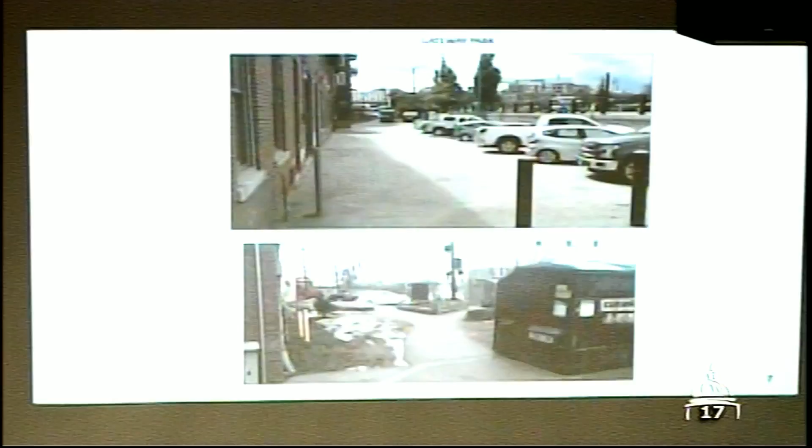That becomes the Gateway Park. This is from the stairs as you walk down to Storrs Street, looking all the way back to Main Street. And this is just a close-up of what you see as you get there—a couple of dumpsters and a sort of forlorn park.

And then this is the Dixon Plaza area, 7 parking spaces sort of stuck between the building and Storrs Street. We actually own about that much of it already, and we'll get about that much more.

So there are 6 ADR items: 3 building elevations - the 1 Eagle elevation changes, the 6 Dixon elevation changes, the 14 Dixon elevation changes - and then 3 landscaped areas: the Eagle Plaza, the Gateway Park area, and the Dixon Plaza. So this is what we're proposing.

For 1 Eagle, essentially we are replacing the storefronts and installing an elevated walkway that provides accessibility to the building itself and to the 4 storefronts. We do that using materials per the vernacular, as ADR says - all the granite and whatnot, using the Main Street design.

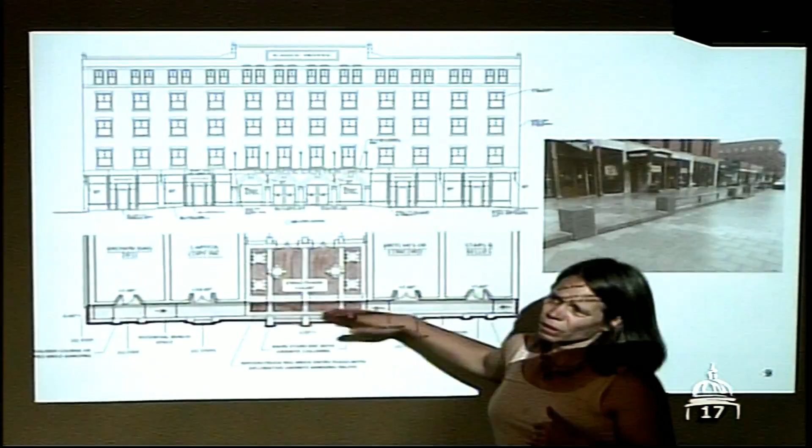That's actually on the next slide, but we propose a canopy there. It's not appearing on this plan because this was really just a landscape architect's plan. But yes, this canopy, which looks sort of like the one on the Bagel Works Plaza, will project over the new walkway section.

If you can back up 1 second, Steve. So if you look, that's One Eagle in front. There's the brick section with all the trees and whatnot, then there's sort of 2 sidewalk sections.

What we are showing extends to this middle line, and only that middle line. We leave this section, what we call the bypass sidewalk, so that pedestrians who don't wish to visit One Eagle are not forced up onto our elevated walkway. They can simply bypass. Part of our development agreement requires the city to maintain that width, which places some design limitations on us.

Thank you. So that's what it looks like. It leads to One Eagle, which has this colonnade in front.

So this is kind of an interesting plaza area. The right of way is here, but this plaza sort of extends under the actual canopy of the building itself, creating a nice indoor-outdoor-ish space.

Next slide please. That's just a little bit more technical version of what you saw. One of the discussions some people on ADR brought up, though I don't think it was a consensus view, was about all these stairs leading up to the storefronts - why have so many stairs? Why not just have a single entrance point here and then the ends?

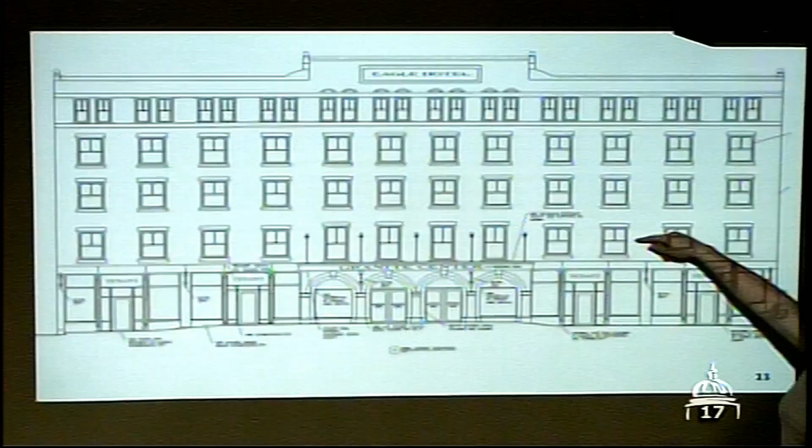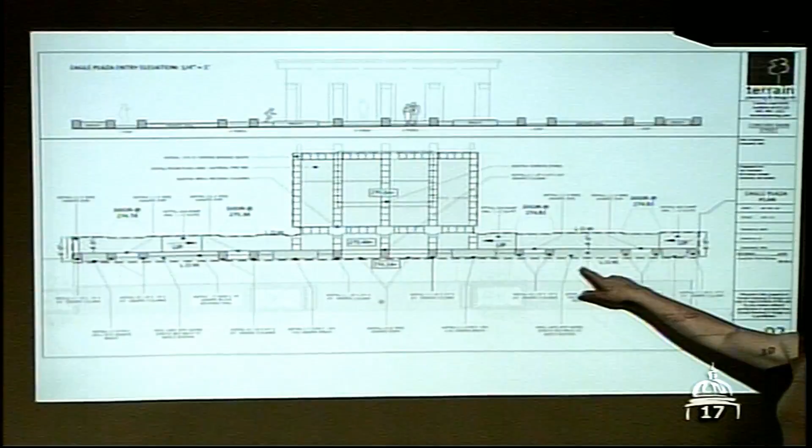Do you mind if I add one more element? Our engineering noticed that these are in front of the entrances, and since it's only five feet wide, there was concern that if someone was using a wheelchair, they might catch this and tumble over. So eliminate these two and put one in the center. I think they might have been open to that idea. The only problem is that doesn't work in this scenario, because between the two storefronts is the ramp, and there's no other place for that ramp to go. So that solution might work here, but then you'd have a non-symmetrical solution.

What I'd offer is that the input of the actual merchants in these stores will be important. If they're on board with just having access points on the ends and in the middle, fine — and there's angled parking in front anyway. I don't think the symmetry really matters, because you won't really perceive it much walking by due to the cars and everything else. But eliminating some will make it cleaner, and in the winter those access points probably won't get plowed anyway. So concentrate on the main one and maybe one on each side, but you've got time to think about it.

Mr. Chairman, may I ask a question? While you have these slides up — I gather you haven't spoken to the merchants yet — I'm wondering if they'll have any concerns, like Brown Bag Deli or particularly Revelstoke when they open, about sidewalk dining, sidewalk tables, things like that.

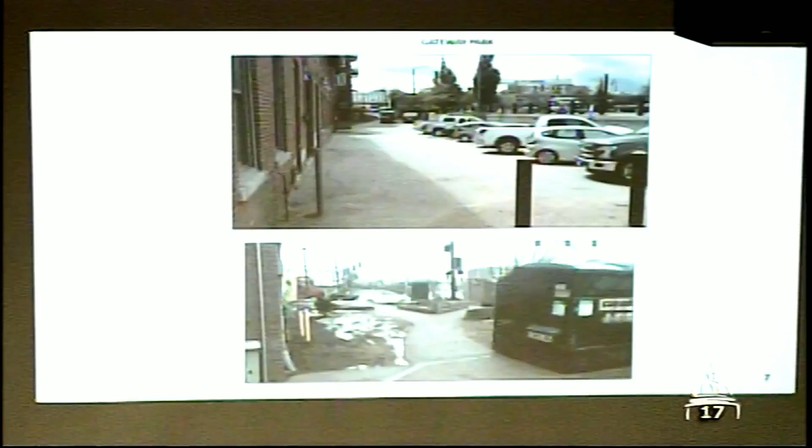On that point, right now, Brown Bag doesn't have any spaces on the brick section that would be available in front of it. It might require moving some mailboxes to a different location in front of Revelstoke.

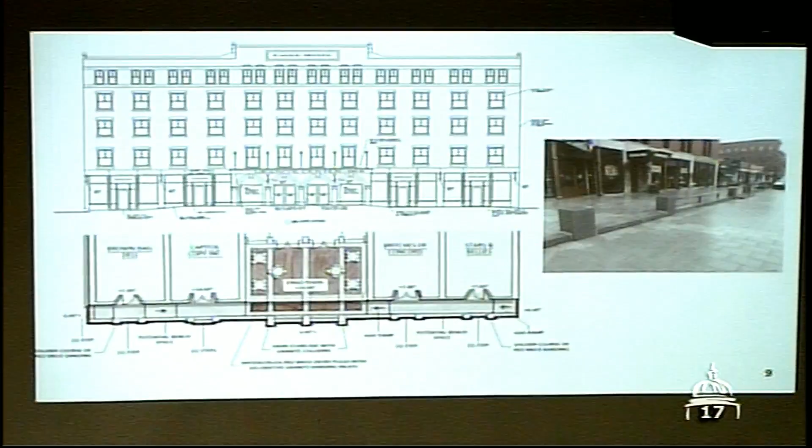The other thing I'd note is that they now have access to this substantial indoor plaza that we will make available for seating for those businesses. And frankly, there's this spectacular 2,000 square foot lobby with sofas and all kinds of stuff, so that's actually nice seating for customers of these businesses too — I think they come out ahead. Thank you, John.

You should mention what the detail on the storefronts will look like down below the granite. So now we get to the elevation of One Eagle. First, nothing changes above this line. Below this line, all that really changes is we strip a bunch of signs off this granite band — we really turn this into a very Mark Ciborowski-looking building, to be honest. When we looked around, we said, let's hope he's not watching — I told Mark we're stealing his idea. It's the highest form of flattery.

It looks great. There are a lot of buildings in downtown Concord that actually have this sort of granite lintel band, granite posts, structural, interrupted by these structural decorative cast iron columns. Mark owns a bunch of those buildings — he sort of gutted out the old store, and when you look at pictures of One Eagle, it's changed. I mean, they started renovating it the day after it opened. There's nothing original left — these are the 8th generation of storefronts that look nothing like the 7th or the 6th. So out they come, and we put in new, clean, energy-efficient storefronts like Mark has done.

Pick a nice color scheme that will make those columns pop. Our interior designer said black storefronts are always classy. We've got the gold dome, so let's go gold on the column. So we end up, frankly, ripping off Mark's idea from Bagel Works. Looks great, I think, and it'll look a heck of a lot like that.

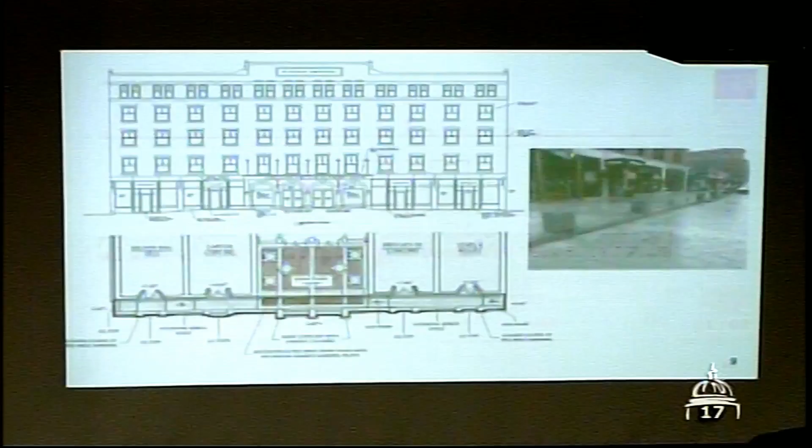The main stairs are here. And all this is in the public right-of-way, the whole project, right? Well, the whole... it's kind of a part of the boring building in some ways. I mean, this is a nice backdrop, I think, as long as you do something reasonably interesting down here.

We're limited in the elements that we can play with, and that canopy was one of the things that we looked at. Good down with Main Street, external lighting on it. Lighting will be part of a later application. It's not, we didn't bring a lighting package to ADR. But that is a good suggestion.

You can take a pretty plain brick facade that's got a beautiful putty-colored window that we can't rip out and change, and do some uplighting that you maybe build into the base of the granite. So the lighting plan is likely to include lights in these little arched windows up above, some uplighting on the old Granite Eagle Hotel. There's no overhang to highlight? No, there's nothing that hangs out that you can uplight, that's the problem. There is a cornice, a brick detail that would create nice shadow lines.

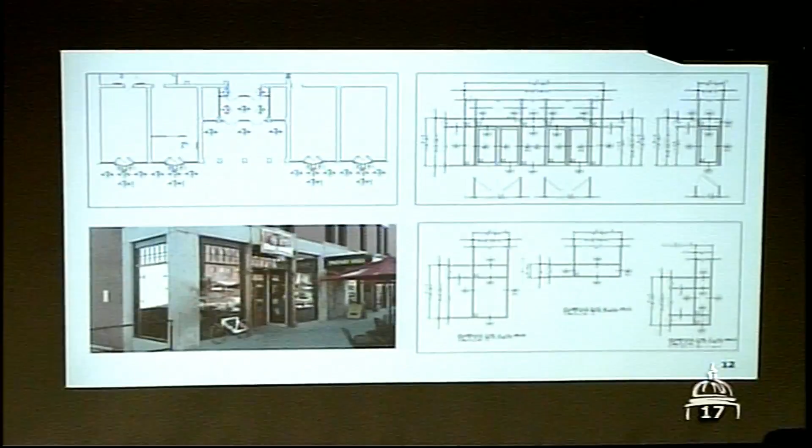So, then on to 6 Dixon. The use in 6 Dixon, one of the CDFA-owned buildings, the bottom two floors are occupied as office by the Lantos Foundation and Resilient Buildings Group. This floor was fitted up as office space and has essentially been vacant forever, in large part because it's not an accessible floor. It's a small building, there's no elevator, so it's sat vacant forever.

The top floor is sort of half renovated and stopped. Our redevelopment plans include putting 5 apartments on this floor and 2 on this floor. In terms of ADR elements, we are replacing the front door, which was a black door that didn't match the aged copper look of the windows, so we're pulling that out. We are removing... sorry to bounce around.

We are removing this ugly vestibule and putting in a new door that's not black but matches the color of the windows. Their idea of a vestibule when they did the original redevelopment was just to give you a spot to come up, and it does provide an airlock, a vestibule internally rather than externally.

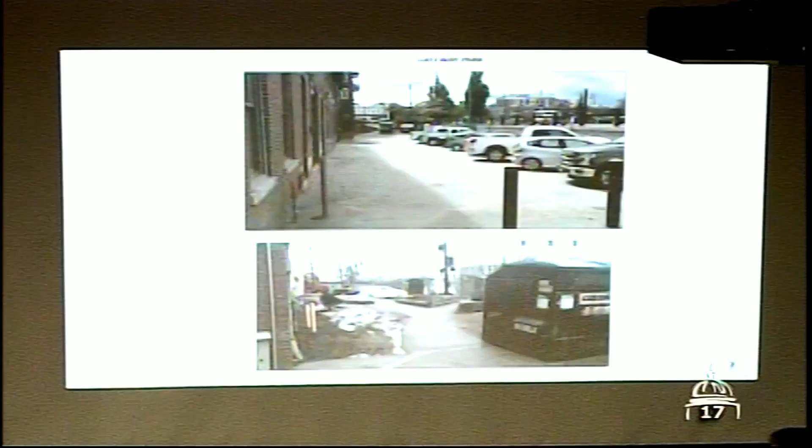As an amenity for the 7 apartments, there are 7 balconies. Unlike any of the ones that created brouhahas downtown, these extend over our own property. There is no license required from the city of Concord, so it does not involve the council. ADR's point was they look like they stick out a little bit far, which is 3 feet. Our response was, as long as you can fit a couple of chairs and a bistro table, we'll shrink it. But we probably don't have a lot to give up before we lose that important function.

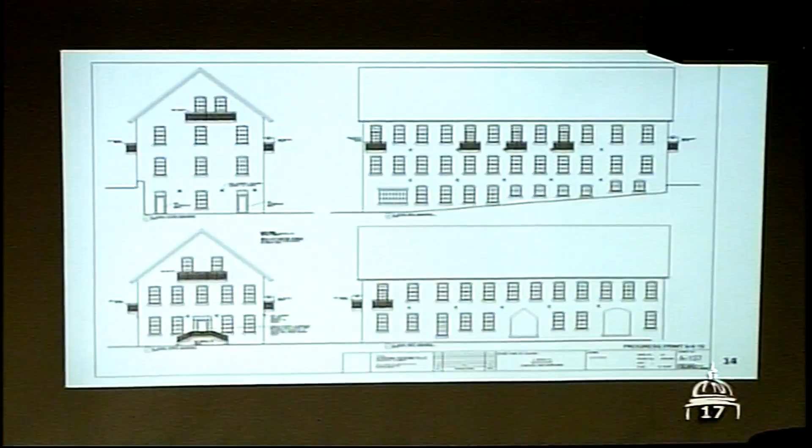They'll be black guardrails. Not boring, I think they should be colorful, but that's me. Why not some colorful balcony on a boring brick building? What color do you want, or do you want multiple colors? I'd do multiple colors to make the building stand out, since there's so much red brick. I don't completely disagree with Heather on that.

ADR did want to know more about the dimensions, materials, and installation method, so they had a lot of questions about the balconies. These things are prefabricated, powder coated, made in Iowa and shipped here, so this will be one of the very last items that ADR looks at. It's important that there be 7 balconies, and they need to fit a little table and chairs.

Did a deal on some LED signage right there too, probably. Yeah.

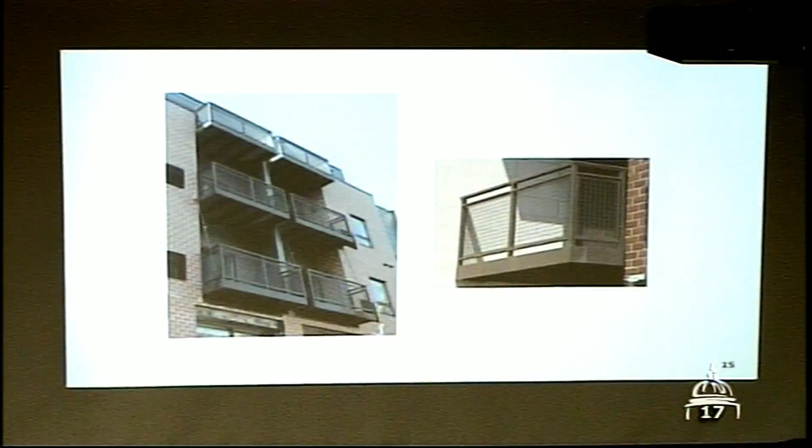Now on to 8 to 14 Dixon, the building that fronts on Storrs Street. This is the front elevation. Very little has changed. Again, we just pull out the doors that are black and don't match the rest of the existing windows, and put in new door systems with a similar color to the existing windows. We pull out a couple of doors and replace them, infill these brick areas, and install new windows because we don't need that many doors in our scheme.

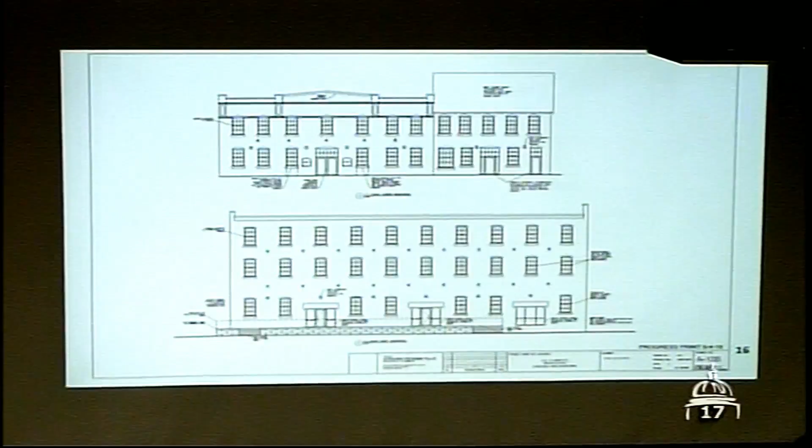On Storrs Street down here, that is currently unoccupied storage space. For reference, the stairs are to the right. So we are looking at this spot right there, lower level, and the stairs, you can see them off to the right.

Go ahead Heather, can you go back to the picture you were just at? I just wanted to draw attention to another of ADR's comments. Above the doors right now, there's wide, clear glass. One of the comments made by one of the members was that in the proposal, they've divided and matched the mullions or partitions of the other windows, but they wanted it to just remain clear glass, not divided into 6 over 6s, just one pane of glass. I don't know if anyone else has any feedback on that.

What's gonna be above there? Is there anything about names, like office names, that are gonna be there? It's just a transom window over the operable doors. So there'll be no sign there, just a number. We don't want to infill it with a metal panel or anything like that.

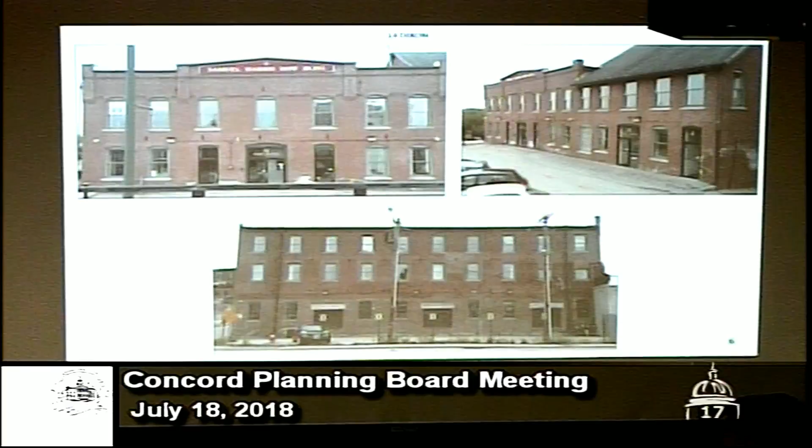Okay, so I don't know - okay, a good note on the ADR note. I could go either way. So then, sing out if somebody's got a question. You recall on this, so there's the stairs down from our Gateway Park. These are overhead doors, falling apart garage doors.

Just to slightly skip you ahead - we landscaped this area out in front, and this is an elevated patio that looks like that. Elevated patio in front of the building and a lawn area.

This will be retail space. Initially, it'll be leased to Concord Antique Gallery. Tom Balin, who has plans to move Concord Antique Gallery, then redevelop that site.

I think, frankly, looking ahead a decade, this is great restaurant space. We almost had a sort of quite significant restaurateur take this space, and at the last minute they said, just build it. Plans are great, build it, and then we'll talk.

So the theory of the patio really is, Tom just said build it - build some, build it, maybe we'll use it. Put a brick oven in there maybe, and just maybe we'll use it. The point of the patio is to show it off, to prove that it would be a great restaurant.

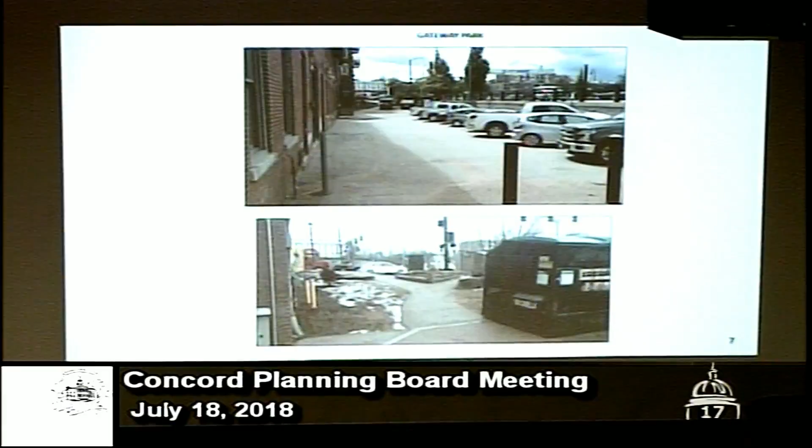So the parks, this area out here, is city property. So you're going to develop it out of the goodness of your heart as a Concord person, and then that still remains as city property, maintained by the city - is that correct? Not on this - on the Eagle Square, we spend the money, but it's the city's property and they maintain it.

From the building envelope out? Right. This entire Gateway Park is the city's right of way. We build it, we spend our money. I think we agree to maintain the plantings - and if we didn't agree, we will do it anyway because we want the trees to live, not die. So that means we're installing irrigation systems in the city's right of way, and putting that on our meters.

Anybody could hang out there. It's a public space. I mean, certainly we benefit by owning two of the buildings that front on this space. It's a fantastic deal for Remy, it's great for the city of Concord. And I think, master plan wise, when Storrs Street goes through to 393 and the Hotel and Conference Center, this is really the single significant pedestrian connection between Main Street and Storrs Street. I think that will be a well-traveled way in the future. The city also has a lot of parking capacity in this area that I think will be unlocked very shortly.

Just to give a little update, the Storrs Street garage, the state keeps going back and forth. I met with them last week because it's $600,000 a year they have to spend every year for the next 5 years to keep it open. That's $3 million. They have a report done, it's functionally obsolete, and they can keep putting 600 grand a year in to keep it open, but they are looking hard, quickly, for other options.

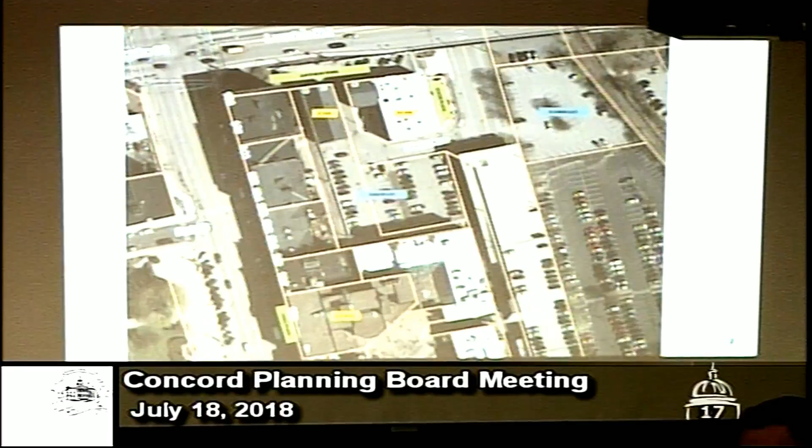Go back one, sorry, and I know I'm gonna ask a question out of order. That one? No, the green one. So, not that there's anything wrong with Remy's building,

the balconies hang over, and we had some discussions regarding that ramp - you had talked about a meandering ramp to mitigate the issues with getting there. Can we just request that the meandering ramp be outside of the fall zone for the existing balconies? I don't want to put the meandering ramp right up next to the building where people are going to meander down underneath those balconies if we don't have to. If we have to, we have to, but if we can keep them outside of the area and let the balconies have just grass under them, that would be better.

A couple slides from now, you'll see a meandering ramp. The reality is that with ADA slopes, it's just a math problem - we're going to have certain portions of the walkway under the balconies. The good news is it'll be ADA compliant, but the bad news is if a flower pot comes off the balcony, we can't get away from it - it's like an albatross around my neck. Good news, bad news, glass half full. If we can reverse the switchbacks to avoid that issue, we will - good point, just keep it in mind.

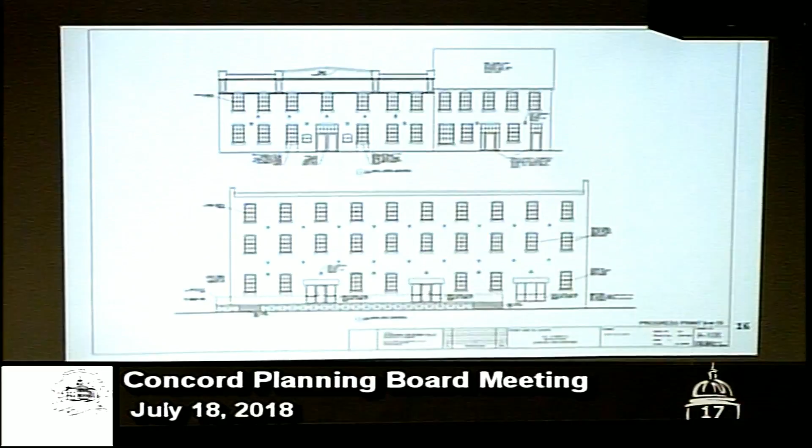Beautiful. There's our Gateway Park. This Storrs is down here, Dixon Avenue comes up and stops right there. And then this is a private alley back behind the Main Street buildings that we own, which, when we see you in August, we'll talk about adding parking spaces on this side of.

So this vehicular route has to remain as part of the whole park. We've tried to soften it by banding it with brick and things like that, but basically completely rebuild this park. That space says 2 handicap spots for parking, and for drop off or quick in and out or deliveries.

Basically, there's 1 handicap space in the lot down here, which does somebody who is handicapped no good because it doesn't get you anywhere near any building. So this is a much better place to have handicap spaces. That's why we create these 2 spaces here, because with the spaces here, you can get from here into these buildings, and with the ramp that we create, up to Main Street.

So, park area, I'll show you. The park area that's on the right-hand side is in front of the existing building.

What's the 5 years down the road, what do you envision that? You envision people sitting out there and having lunch? If you walked out of that building and looked dead straight across, are you looking at the bottom of the Loudon Road Bridge area, or are you looking at the big girder?

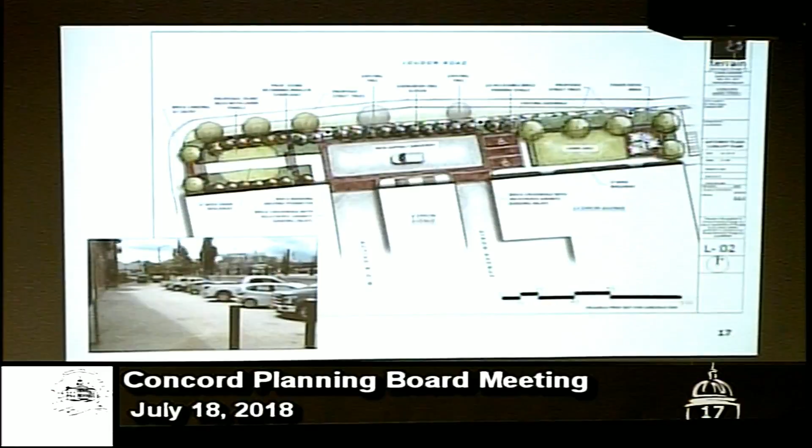That's the Dixon Plaza area, again, sort of an elevated patio and a lawn area enclosed by a fence, it's a Cheers patio-like thing. Our landscape architect said this reminds him of some good restaurant uses he's been involved with, where there's a patio, the adults can sit there, and there's a lawn that's fenced in, and the kids can run around it. You're waiting for dinner to come, and the parents feel secure because there's a fence.

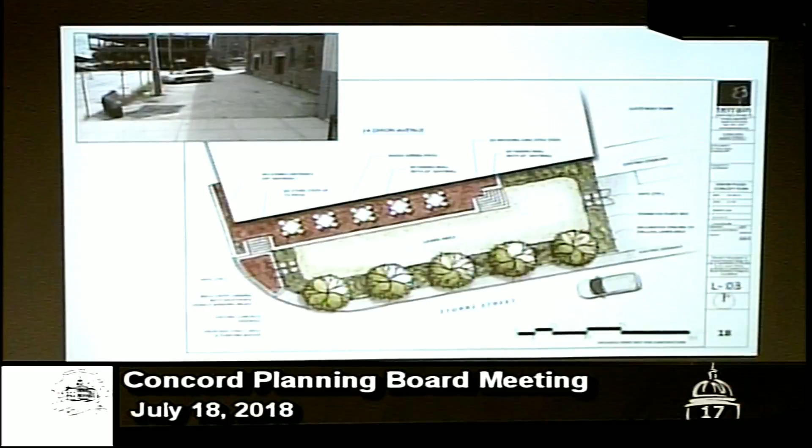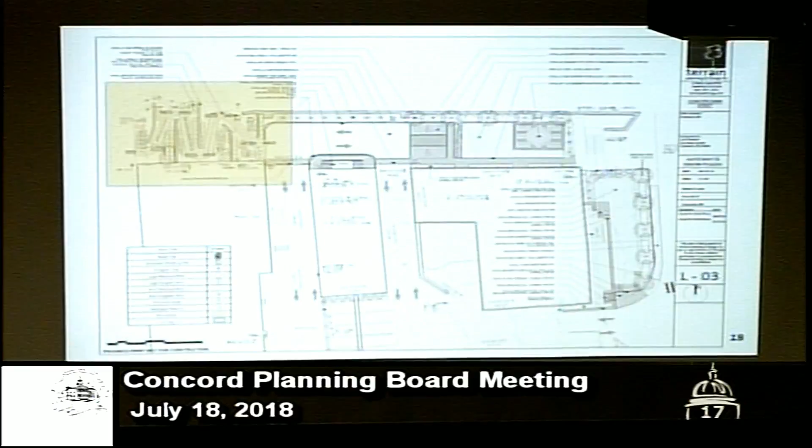So that's the longer term plan. In the short run, just a nice space to look at. So here's sort of the official plan of this whole area, and this is reworked, I'll show you a more detailed version of that. So that area beside Remy turns into this sort of serpentine walk, and it will actually become more serpentine than this. This is a little bit angular, as Sam and I were talking before.

We're actually turning it into a serpentine walk that looks like Walter's Wiggles, the walkway that goes up Angel's Landing in Zion National Park. If you Google this, the whole point is, rather than trying to hide the accessible elements, to turn them into the artistic element in the space. To provide accessibility, there needs to be a lot of feet of ramp, like 95 feet of ramp. The only way to do that is to jiggle it back and forth, so why not use the design of that to be the artistic statement.

So it'll be like this, but frankly more curvilinear. And the retaining walls will actually be sort of on the underside, so I don't know if you can picture Carlsbad Caverns or any of these things where they just sort of wind like this, and when you're at the bottom looking up, you just see this interesting crisscrossing of steps.

Is there ever a way, let's say you wanted to get there more quickly, is there a way to have steps, like a more direct access for people who could take steps, or no?

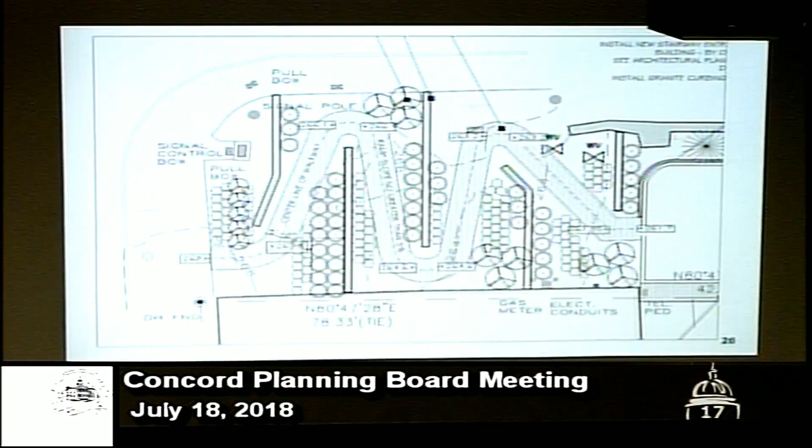Okay, so we are looking for a little approval, which to me means an approval with a condition—approval with an asterisk. And the asterisk is that we can build all this stuff, but no one who works under any of these roofs will give us a CO unless we've, in the meantime, come back and gotten a big design approval done again.

I think, though, we have to do a lot of planning. Not only do we need a building permit, we need enough guidance to continue making planning decisions. So I think we need at least a conceptual approval, similar to the discussion we had at design review.

If there's anything you hate, tell us. If you basically like it, tell us. And if there are particular details you want to see, in addition to what design review cares about, tell us so we can be mindful of that.

What I think would be important—some of the conversation during ADR was leaning towards getting rid of all the blocks, getting rid of the benches, just making it very simple and wide, the way some of the other ADA ramps are that are on Main Street.

Eagle Square, correct. So instead of making it 5 feet with all these different elements, make it 6 feet or as wide as you can, and make some of those elements very tiny, maybe 6 inches or 4—I don't even remember—or eliminate them altogether and just make it very basic like the other ramps, to allow more space for walking, because the feeling was that 5 feet was too narrow, which is a pretty major different direction from what they're proposing.

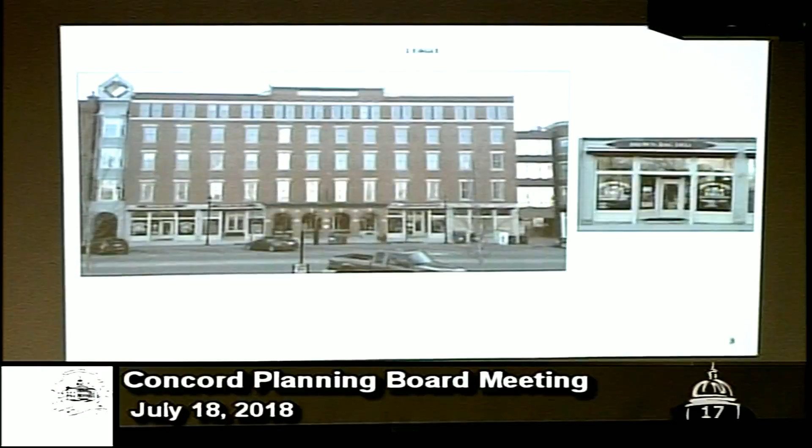What's to the left - can you go there, is there a picture you can show of what's to the left of that building right now? Liberty Utilities - is it a door opening? Yes, it's right there. Let's go back. So I can go from there to there.

And there are issues underneath that space too, right? I mean, you've got something that comes out underneath here. Yeah, but I don't believe it's here. We can look into that.

That's my only concern, because I know we did - whether it's there on the Bagel Works building or not - it's probably a mistake in the sense of the process. If we can do that, I'd rather ramp it at that point.

And if you can get to a 10-to-1 or something on the pitch, whatever the pitch might be, as long as it's close - it's really purely a math problem. It's whatever that elevation is compared to that distance, and that's the distance. We can't make that up.

You can't make up any distance. You can't make the front of that storefront any lower, can you? That granite that's there doesn't go any lower - you can't magically take out accessibility issues, you can't magically take out a couple inches of granite on that, okay? Right, that's why it's there.

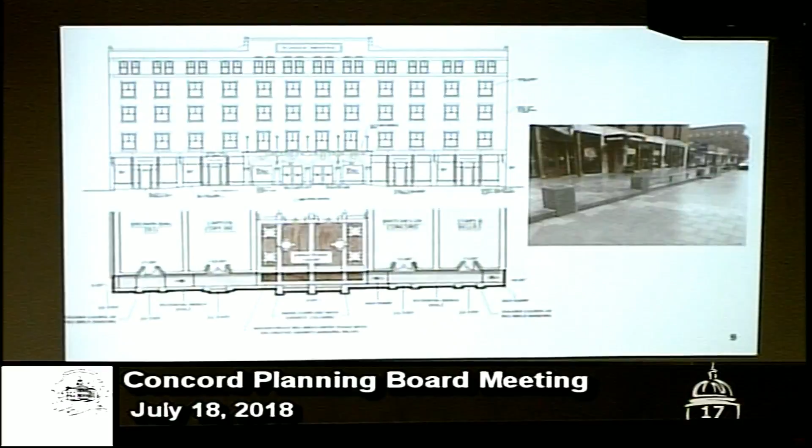Go ahead, Byron. Thank you, Mr. Chairman. All good points. I won't weigh in on whether there should be a stair there or a ramp. However, I will say that to the extent you can integrate the benches and whatnot, I think that's a great idea. Some of the original design for the Main Street project integrated functional seating in the garden plantings, for example, and I like that idea.

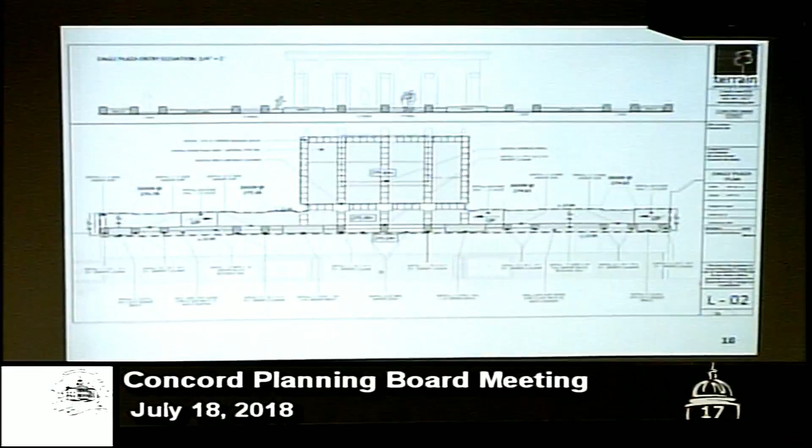The only other comment I would make - two comments. First of all, I think this is an exciting project. And thank you both for engaging in this, really an important corner of downtown.

My only other comment is, I think everyone knows I'm very enthusiastic about trying to uplight some of our historic facades. So to speak to the chairman's comment earlier, anything that can be done to do that tastefully, I would like to see.

Certainly, because this building can really lead the way in that regard. And it's prominent - it's right opposite the State House, which is well lit. The memorial arch to our war dead, and the Franklin Pierce statue, and the memorial to the war dead from World War II on, are all uplit very tastefully. And I think that whatever could be done with the Eagle Hotel would complement that lighting.

So, can you go back to the slide that showed the entrance we were just looking at? The picture - so keep going back.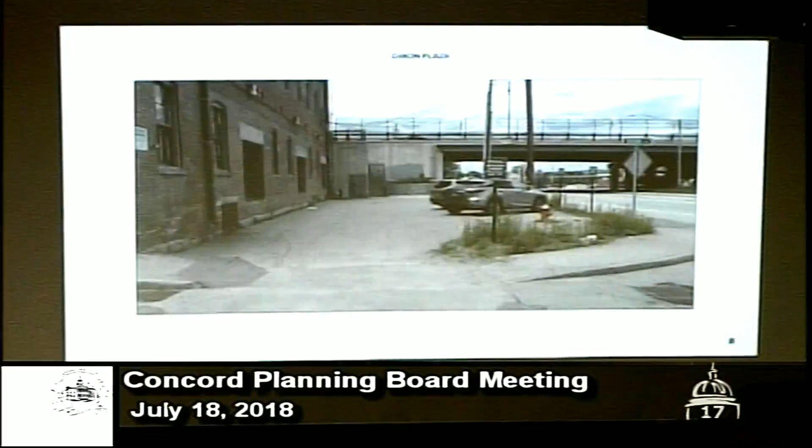So, if I remember on the Eagle Square Deli, if you walk up and go in, you've got space to the left and space to the right. If you're gonna replace those storefronts and there's nothing there, could you replace the storefront entrance to the right? Could you push it over to the first bay and give yourself an extra 4 feet of distance on the run? I understand the aesthetics, but I think we'll get hung up at design review.

It would be asymmetrical. I think the symmetry is important enough for the building. Okay, yeah, okay.

But we'll look at it - we prefer a ramp. We'll look at what that rate is, and whether, because of accessibility meeting code on the other end, we can get a waiver and talk to the Disability Rights Council. That's great. We can look at putting in...

textured walkways on those metal plates - what do you call them, Brian? We have sidewalks near our house that are like this, but they have those sort of pebbles - detectable warnings.

Yeah. I don't know if there's a way to do a non-compliant ramp and somehow put a railing and maybe some alert sign or whatever - I'd rather have that than a step.

Yeah, I mean, there's an existing conditions element there, and if you have it on the other side, from my experience, I think you'd probably meet it.

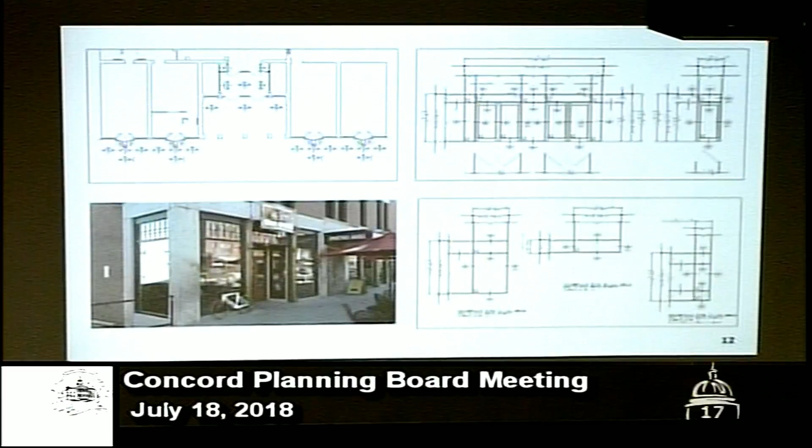One of the nice things is that all the doors are set back in the entrance, so it should be okay - about 36 inches, so the door swing does not extend beyond the plane of the building.

More seating, got it. Any other questions? So I didn't get a clear indication from the board on the bench versus no bench. Yeah, good point - just think about it.

Yeah, I mean, the low metal walls like you see out in front - would there be any planting? Any plantings on the bench wall? Probably not, no, it's not wide enough. Oh, why not? No, I think the benches would be great.

You know my opinion, I agree - I think the benches would be great. And there are a lot in this design; even if we had stairs, there are a lot of benches.

And access for those two food establishments - they'd be able to utilize, you're gonna make available in the portico space, tables and sitting areas inside that portico, whatever you call it, the entryway or the plaza space. Yes, and part of the thinking is that end of town, when we did the Main Street project, is narrow.

We don't - all the space for that's over in front of the arch, as it was designed, so there's a real disadvantage at that end of the street. There's also a little space for a few tables there. But yes, we will make the plaza space available.

And the lobby too. My recommendation, from hearing what the board's saying and hearing everything ADR said, is I would explore the steps/no-steps option to see if that gives you a little more room, maybe gets you to 5 1/4 or 5 1/2, and then explore making the benches, instead of 1 foot, 8 inches instead of a full 12 inches.

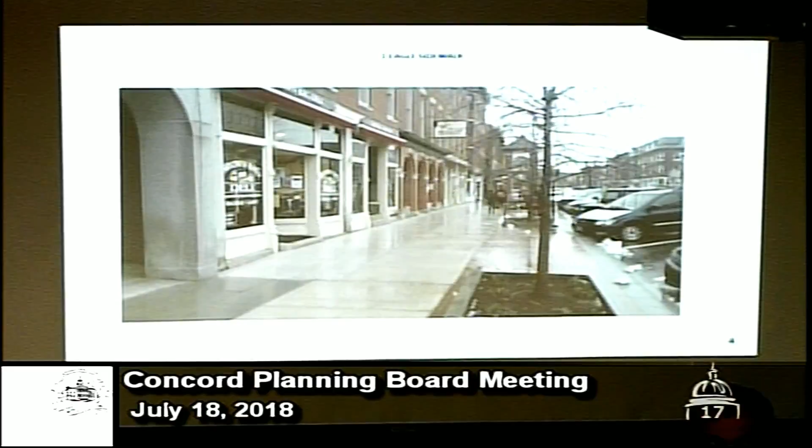So you're going to put a bench in and a ramp inside that first space? That's the point. Right now it's only 4 feet, so it's a 4 foot through ramp, which is pretty narrow, and then you have 2 feet that they're using for bench and steps. So just see if you can slim that up.

I have something, yes Teresa? I think this is exciting, I think I like the whole concept. I happen to like your colored balconies too. One vote, just one vote.

Okay, let me ask the question. Any other comments from the board? We're looking at a conceptual plan. Yeah, you guys are already designing the balconies.

So what we need to do here is grant approval of the plan that we've been presented, subject to the condition that the applicant come back to ADR and come back to the planning board before any certificates of occupancy are issued. Did I say that right? Perfect, so moved. So it's been moved, and that's been seconded.